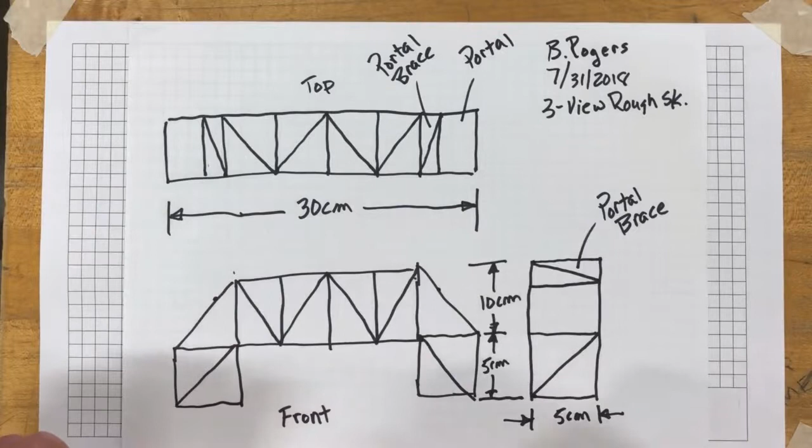Hello, the goal for this video is to create a 3-view scale sketch of your proposed bridge project. One of the first things you need to do is make sure you have a 3-view rough sketch ready and available so you can look at it.

This has all the information we're going to need to make a scaled drawing of your bridge project. We'll begin by talking about the scale of this drawing: one of these squares equals 1 centimeter of length. To get started, go up 4 squares from the lower left corner, over 4 squares to the right, and place a dot. This dot represents this corner of your bridge.

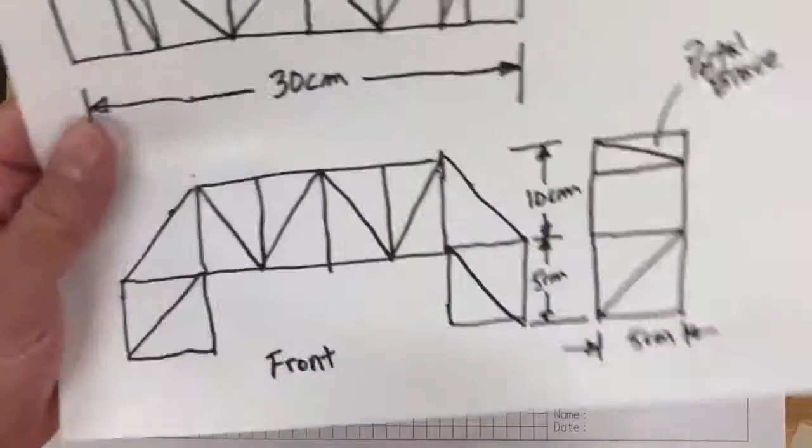You're going to measure out 30 centimeters according to what you've planned out. I'll take my pen here—in your case it's going to be a pencil—and count out 30 centimeters. All right, so there's 30 centimeters.

Now looking back at this drawing, we have 2 5-centimeter piers at either side. So I'm going to measure up 5 centimeters: 1, 2, 3, 4, 5. Place a dot, and do the same on the opposite side: 1, 2, 3, 4, 5. Now the piers go 5 centimeters toward the center, so I'll measure in 1, 2, 3, 4, 5 and place some dots there—those are going to represent the piers of the bridge.

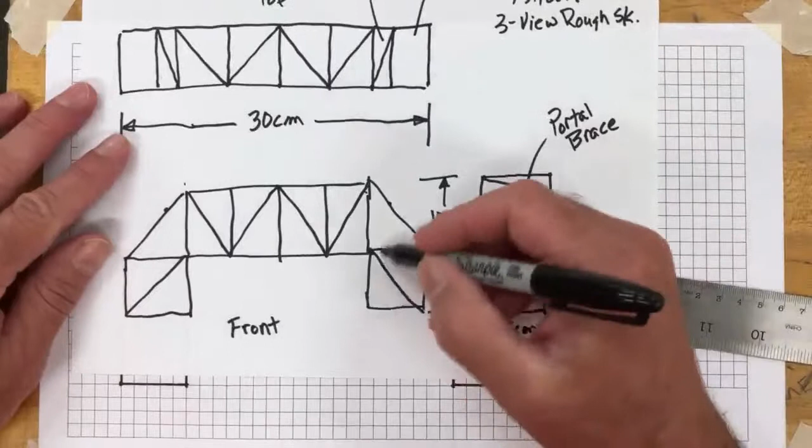Now I'm going to take a straight edge and start drawing in some lines connecting up my dots, some vertical lines going, and then we're going to put the roadway in right here. Looking back at our sketch, you can see we've done this part, put in the roadway. Now we're going to put the trapezoid shape in.

It's 10 centimeters tall according to my plan: 1, 2, 3, 4, 5, 6, 7, 8, 9, 10. Same way on this side: 1 through 10. Now we can go ahead and connect up some dots, connect up the top, and connect up some diagonals for the trapezoid. All right, there's the basic shape.

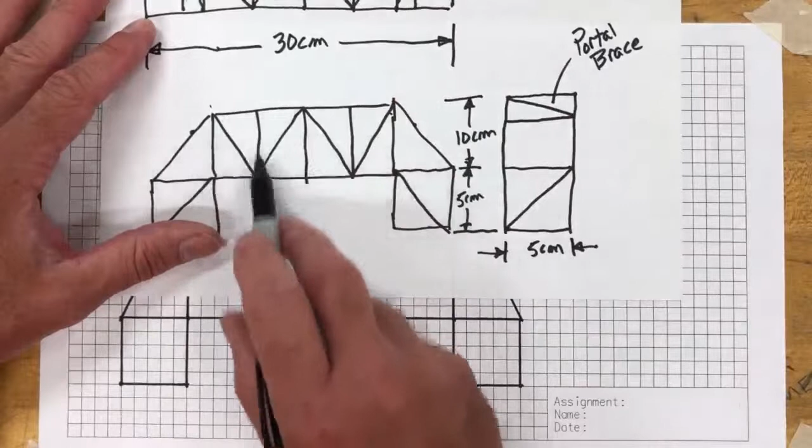Now, according to our plan, we're going to place some diagonal pieces in here. One thing you're going to have to do is take a look at the spacing—we have to figure this out. Since each one of these represents a centimeter, we need to get this divided evenly. I see I have 1 opening here, 2, 3, 4—remember I divided that into 4 equal pieces. So I need to know the total distance between these 2 points, from here to here.

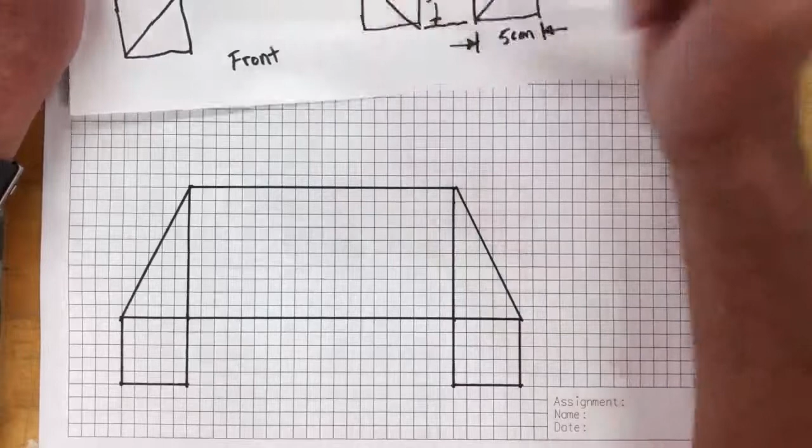If I look back on my drawing, I know that's 5. So I got 5 here, 5 there, that's 10 total. Subtract that from 30 centimeters, that must mean I have 20 centimeters between these 2 points. If I'm going to divide that into 4 equal pieces like my plans indicated, I have to take 20 and divide it by 4. That ends up being 5 squares: 1, 2, 3, 4, 5, and 1, 2, 3, 4, 5.

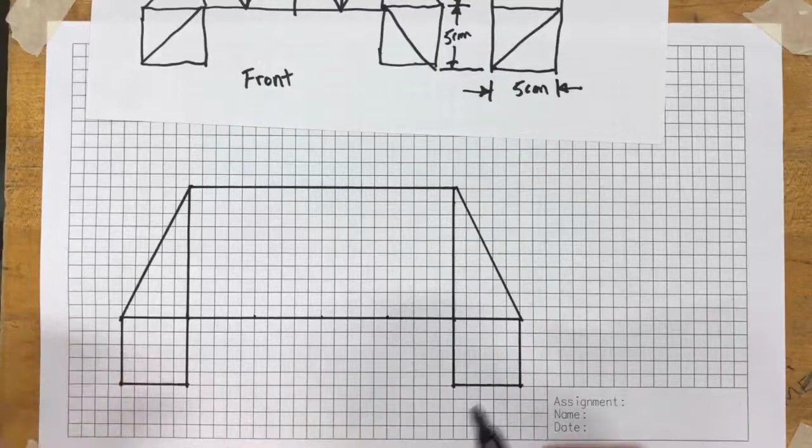Once I get those divided evenly, I can start putting some verticals in here. Once I get all those set, remember we want to divide everything into triangle form. So I'm going to take my ruler and join opposite corners—this opposite corner downward, upward. Notice how I'm connecting up my dots precisely there. I want this to be your best drawing so far.

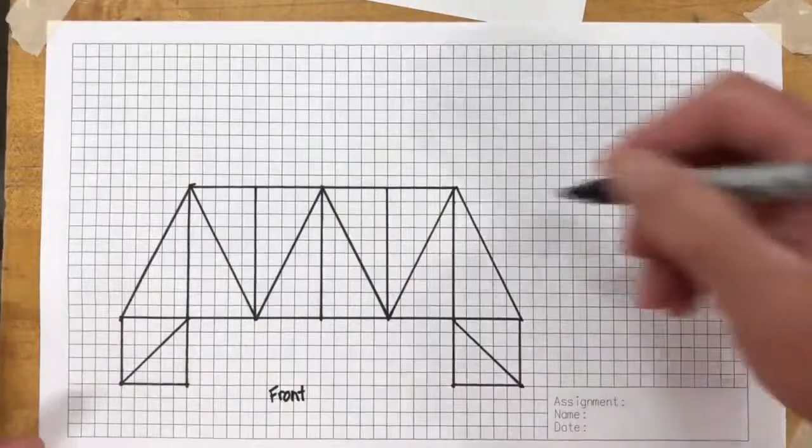Alright, so there we go. That's what we call the front view. I'm going to put the front designation on there. Now I'm going to go ahead and start my top view. You can see from my 3-view rough sketch that it's the same length as the front view, so I can just project along here.

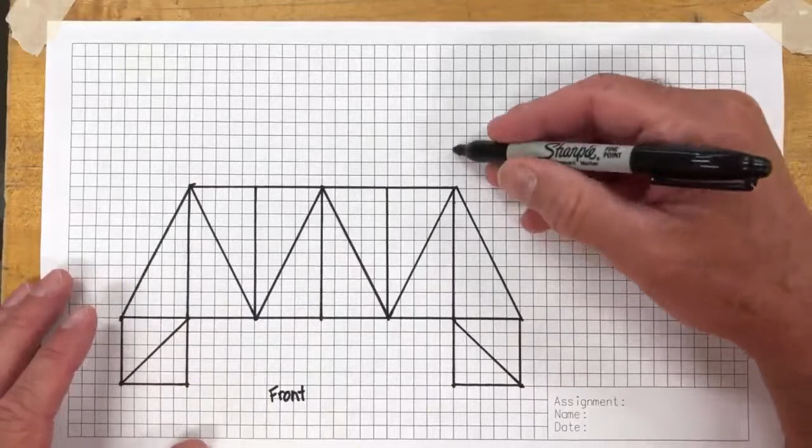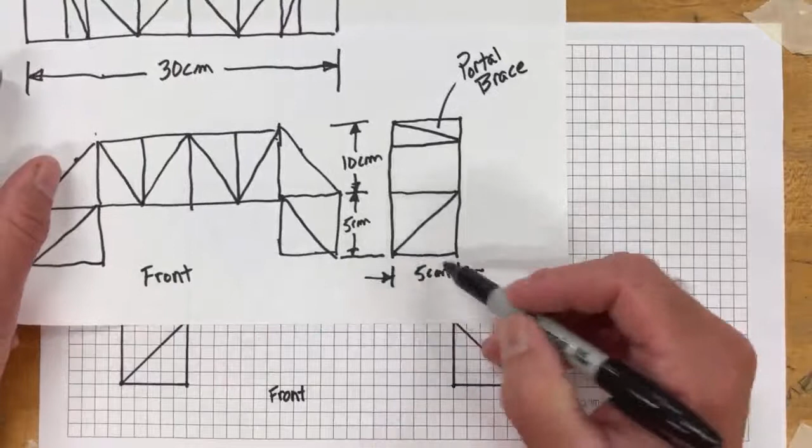I'm going to give myself about 3 units of space between my views. So I project along this grid line here, stopping right about there, and do the same on this side. Now I've got to take a look at how wide this is—here's the width of the bridge, or the depth of it. It's 5 centimeters: 1, 2, 3, 4, 5, and 1, 2, 3, 4, 5.

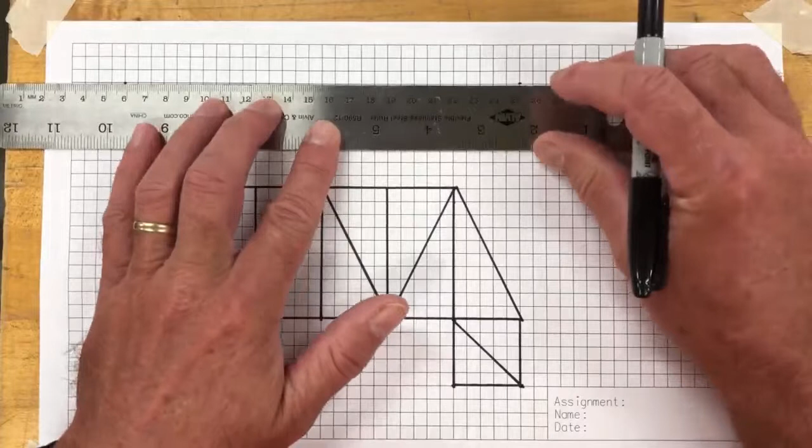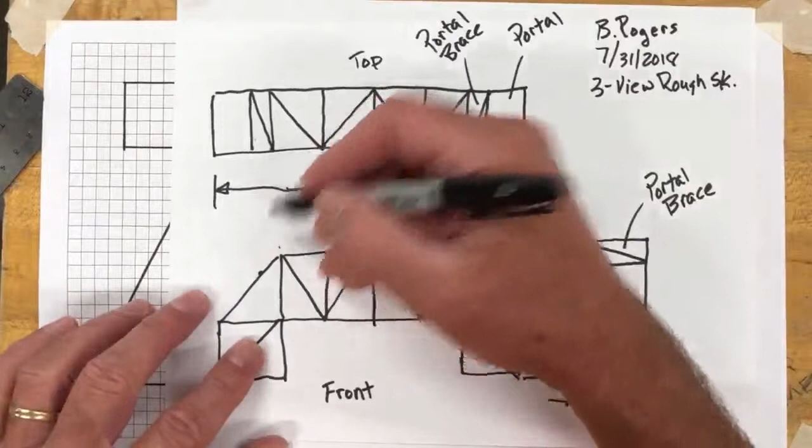And so now I'm just going to create a rectangle right here using these dots as guides. Overall, the view of the top of the bridge is going to be rectangular. Connect up my vertical pieces here. So in essence, this drawing is exactly the same as what we've done here, except the only difference is we're drawing it to scale. I can see here that the top is in line with that, so I'll place a dot here right in line with that, same over here, and put in some vertical pieces.

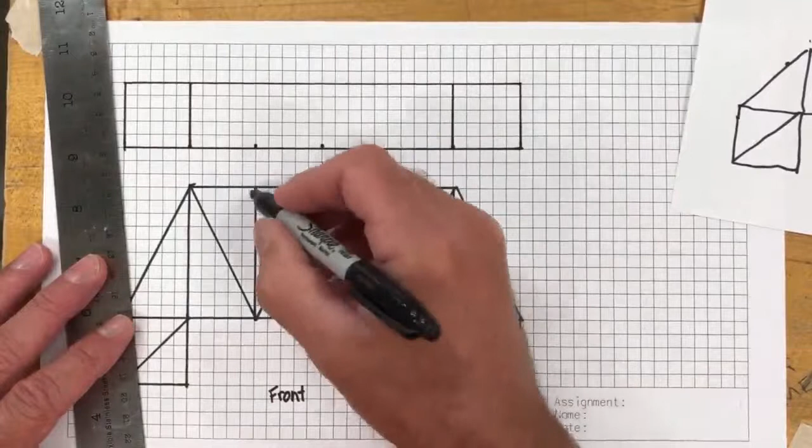And then I'm going to rely on what I've drawn here in the front view to help me with the placement of members in the top view. So you see I'm just projecting along the grid lines here—it's very simple. Now I'm just placing some vertical lines here, and then I'm going to join those up with diagonals as well, just like we talked about in the rough sketch.

All right, so there we've got the top view. Now remember, these are our portals, so I'm going to go ahead and label that. And we're not going to put anything in there because we want to get in and out of the bridge. If we put a cross beam or a diagonal piece in there, it's going to block off the opening to the bridge.

All right, right side view here. I'm going to go over about 4 spaces, 4 units, and project over along this grid line. I know the depth of the bridge is 5: 1, 2, 3, 4, 5. So I'm going to put 4 dots there, and connect those dots up just like this.

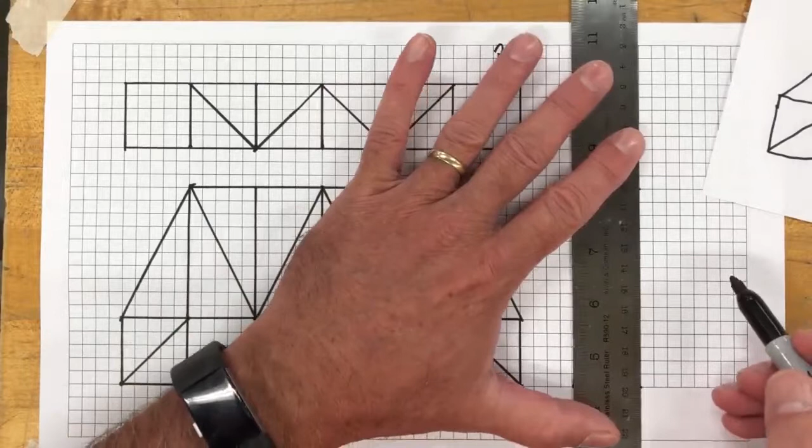Now for the roadway, I'm going to project over here. It's very simple, just using the front view as a guide.

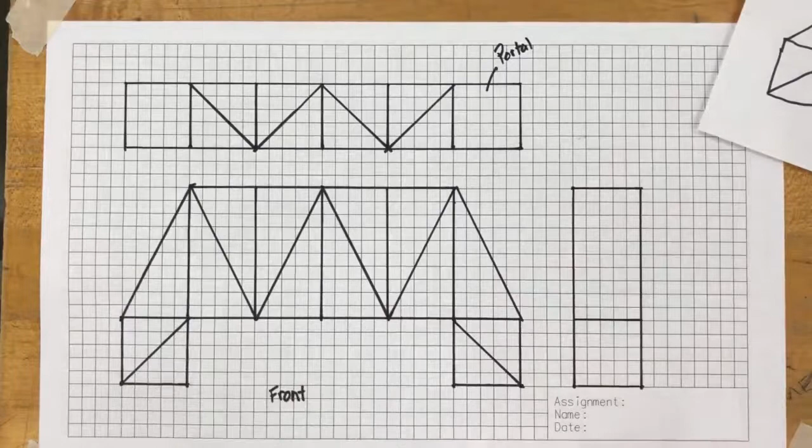Now at this point, remember we said we don't want to block off our portal, so I'm going to go ahead and put a diagonal brace in here. According to my plan, it goes this opposite direction, so you want to refer back to your sketch frequently, your 3-view rough sketch, you see, so I want to make those go in the right direction.

And then the portal brace, now this one's pretty tricky. A lot of people ask, how big do I want it? Well, it's kind of up to you, you just decide what you want to do. Ideally, if we were designing for a specific roadway, we'd measure the tallest object expected to go through there, add a few feet to it, and make our design decision based on that.

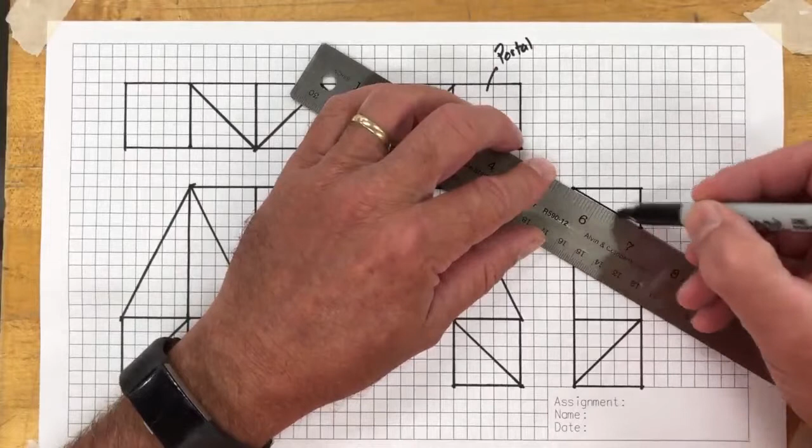Taking a look back here, the diagonal goes that way, so I'm going to go ahead and place a diagonal going this way as well. All right, let's go ahead and label that out. That's my top view. I'm going to put a right in here.

Oh, and this would be a good thing to fill out too, your title block, since I've just noticed that. This one's 3-view scaled sketch. And of course your name, that's pretty easy. And the date would be... all right, there we go.

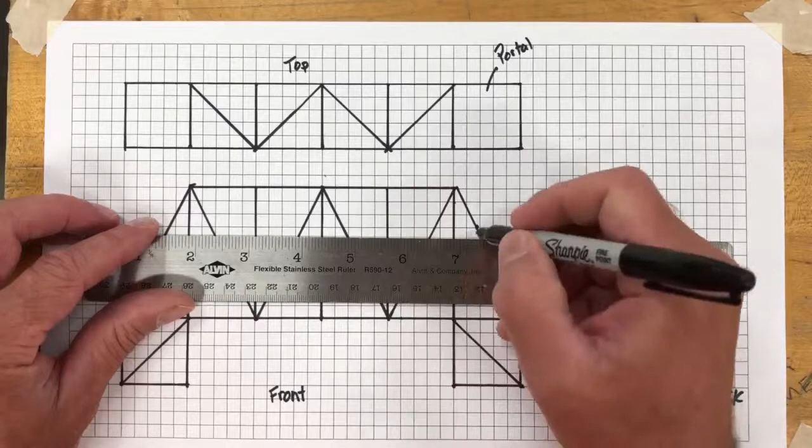All right, so there's a right side view. Let's go ahead and take care of our portal braces up here in the top. This is pretty easy - what I'm doing is projecting the location of this piece here to this point where that grid line cuts through this diagonal brace, then I can project it up into the top view and place a line right here.

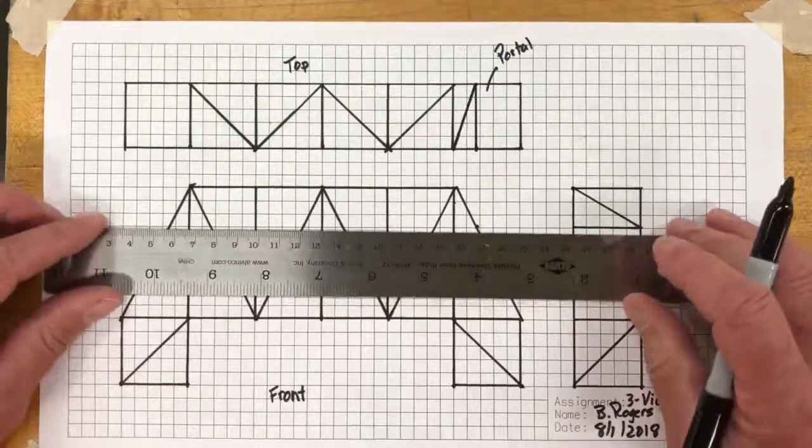Now the diagonal goes from the bottom side upward, according to my right side view, so I'm going to put a diagonal in like that. Now I'm going to do the same for the opposite side. Project a point right here, which projects right there, and put a line across there like that. And I'm going to do the opposite, something like that. All right, so there we go.

There's our bridge. We've got our front, top, right side, and our portal braces in there. Why don't we make a note - portal brace.

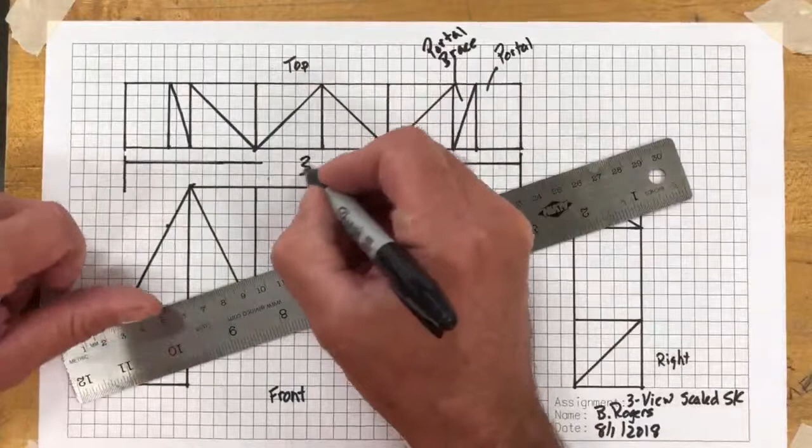All right, now let's do some dimensioning. When I dimension there, I always start off with my extension lines. I'm going to put 2 extension lines here, and then a dimension line in the center. The dimension line is just a straight line. I'll leave a little space in the center to indicate how long it is in terms of centimeters, so I'm going to put 30 cm here, just like we did on our original drawing, and put some nice crisp arrowheads on there.

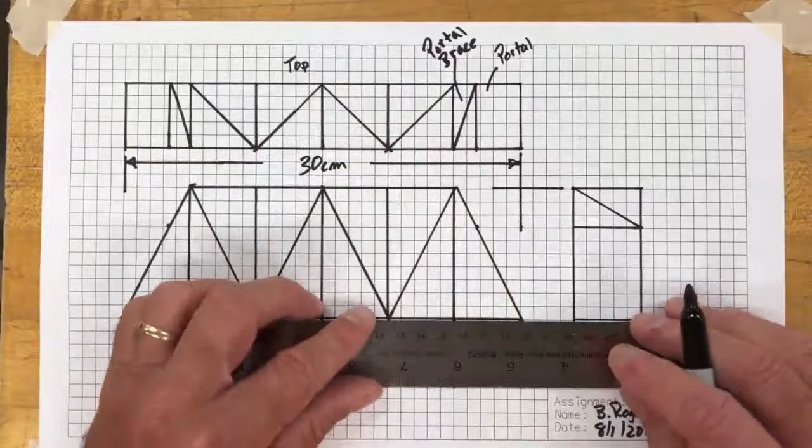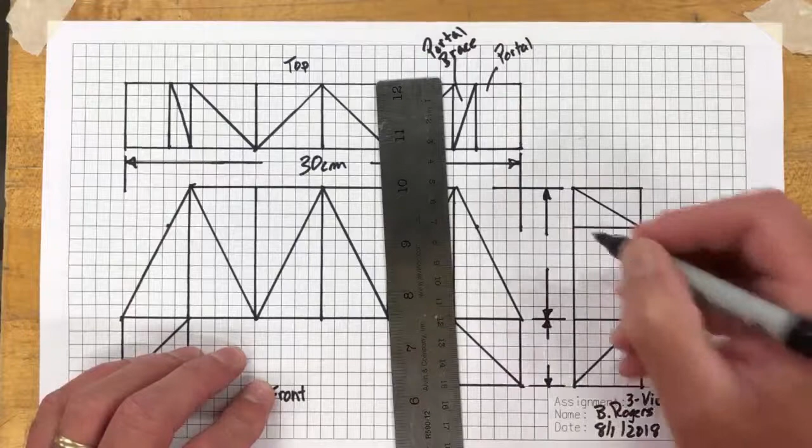We're going to go ahead and get some height dimensions set up. So there's my height dimension. I'm going to put a couple extension lines here, and one here also because we need to know how tall the roadway is. With those in position, I'll put some dimension lines in here, leaving a space so I can put how tall I expect that to be in terms of centimeters, putting my arrowheads in here. Arrowheads touch the extension lines, but they don't go past it. Take a look back at my drawing - 10 cm.

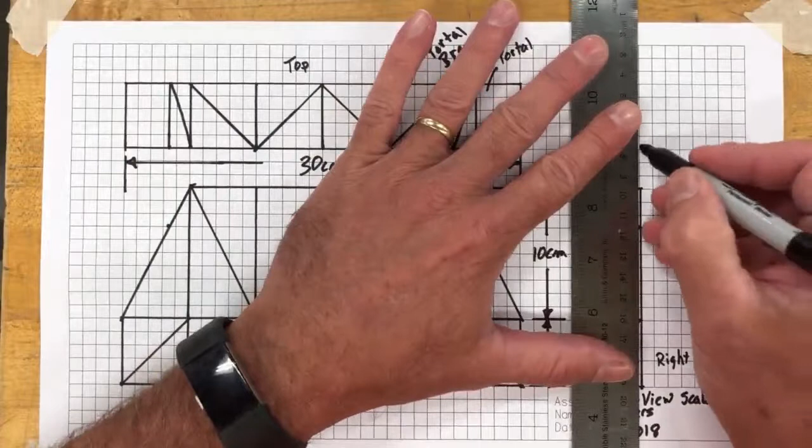5 cm. And then the last thing I want to do is put in a depth dimension here - how deep is the bridge? That's going to go right here, and that's 5 cm as well. I'm going to put some arrows on the outside, which is an acceptable practice.

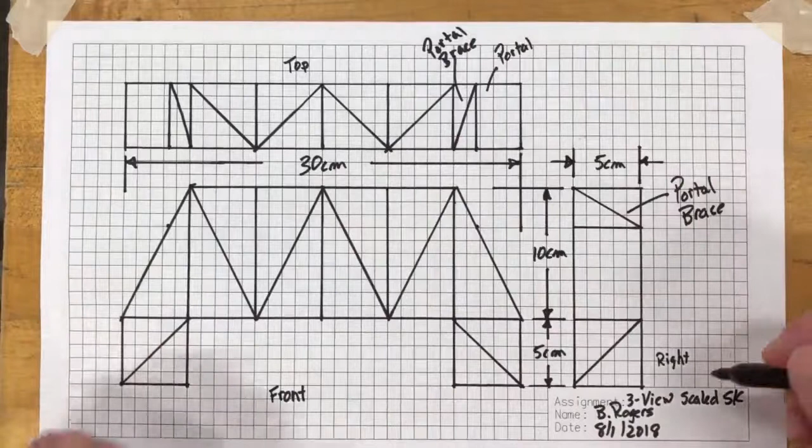Last thing I'm going to do is put a portal brace note. And there we go, I think that's complete. So: title block, fully dimensioned, portal brace notes, view labels - front, top, right side. Well, good luck with your drawing.